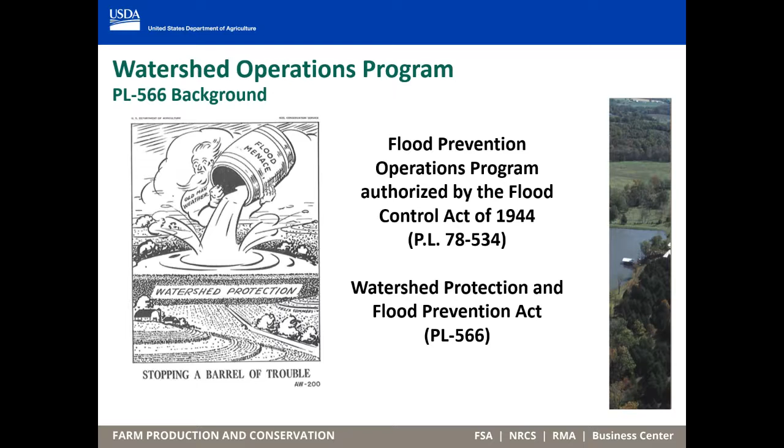So I'll just jump right back on it here. So let me give you a little bit of background on the PL 566 program in case you're new and this is your first time hearing about the program. The Flood Control Act of 1944 and the Watershed Protection and Flood Prevention Act, Public Law 566, PL 566, are the foundational legislation for the Watershed Operations Program. The purpose of the program was to authorize the Natural Resources Conservation Service to provide assistance in the planning and installation of flood control measures to reduce losses caused by flooding.

The Watershed Protection and Flood Prevention Act, as amended, authorizes the Secretary of Agriculture to cooperate with states and local agencies in planning and carrying out works of improvement for soil conservation and for other purposes. It provides for technical, financial, and credit assistance by the USDA to sponsoring local organizations, SLOs, representing the people living in watersheds. It also provides for needed additional treatment and protection of federally owned lands within such watersheds.

The Watershed Program requires the development of physically, environmentally, socially, and economically sound watershed project plans with actions scheduled for implementation over a specified period of years. Watershed project plans contain project actions which are formally planned undertakings carried out within a specified geographic area by sponsors for the benefit of the general public.

Public Law 566 sets forth three general purposes: preventing damage from erosion, floodwater, and sediment; furthering the conservation, development, utilization, and disposal of water; and furthering the conservation and proper utilization of land. The previously mentioned general purposes are more specifically refined as shown here. Every NRCS watershed project will have one or more of these purposes. In the next few slides, we will review each purpose in detail. As we do so, think about watershed scale projects in your area that could be addressed under the authority of one or more of these purposes.

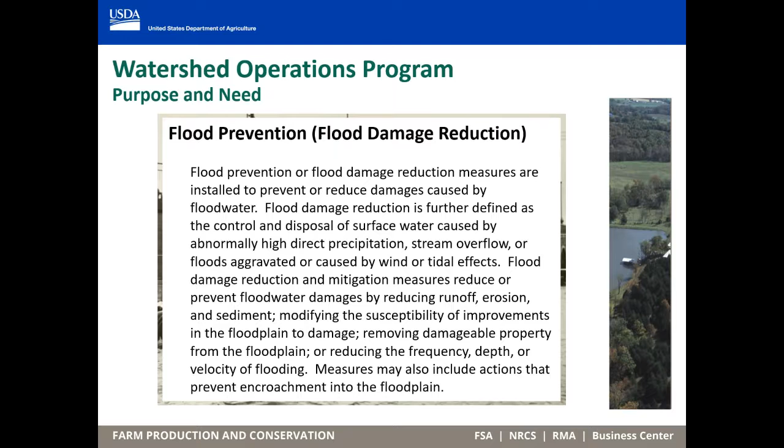The watershed protection purpose consists of land treatment practices within a watershed that result in reduced off-site flooding, erosion, sediment, and agricultural pollutants. Project measures result in conserved or developed soil, improved water quality or quantity, enhancements to woodland, fish, and wildlife habitat, recreation, and scenic resources. Watershed protection can also involve the conservation of energy.

The NRCS office in Tennessee worked with the town of Oneida to implement a project with this purpose in the Bear Creek watershed. Remnants of mining in the area during the 1800s resulted in acid mine drainage going directly into the creek, all but terminating any life in those waterways. After reclamation efforts and treatment of runoff through the watershed project, aquatic life was detected in reaches of Bear Creek that had been void of life for many years. The project also had a tremendous unexpected benefit of economic development to the area, increased home sites, and the construction of a recreational sports complex.

Under the public recreation purpose, measures may include picnic areas, sanitary facilities, fishing piers, shelters, cooking grills, parking areas, swimming beaches, access roads, water and trails. The public fish and wildlife purpose involves the improvement of the habitat or the environment for the breeding, growth, and development of fish and other wildlife.

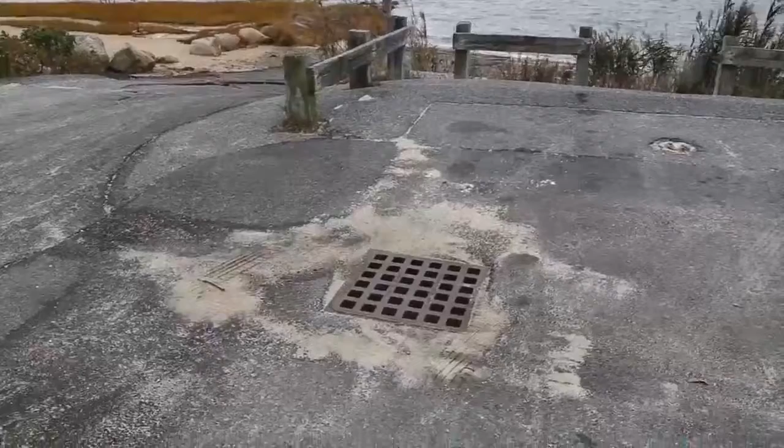It was discovered that inputs from septic systems and from roads and parking lots were the main culprit. What's happening in this location is after heavy rains, the stormwater runoff discharges into the marsh, and it carries a bacterial load, which then causes the state to close this area for shellfish harvesting. The first flush of runoff from a parking lot, from a roadway, from a watershed, particularly after a long dry period, contains about 85% fecal coliform.

And so we base our design criteria on treating that pollutant. We found 4 locations where the runoff was controllable and impactful. This is one of them. This is the boardwalk area. Across the marsh there was a parking lot that we also did some work on. We directed the runoff to these retention areas.

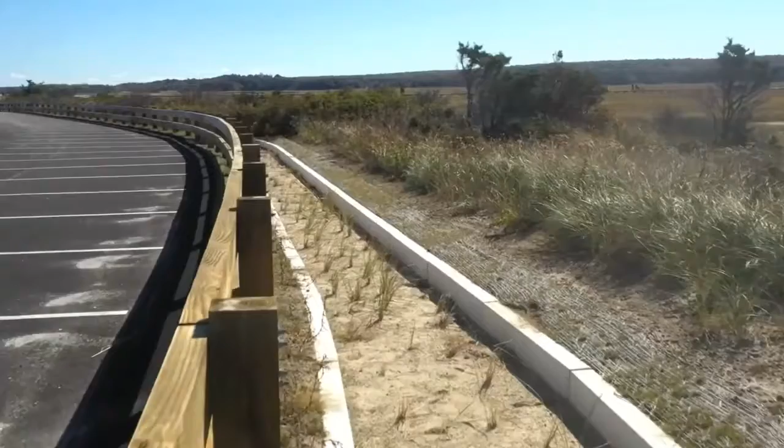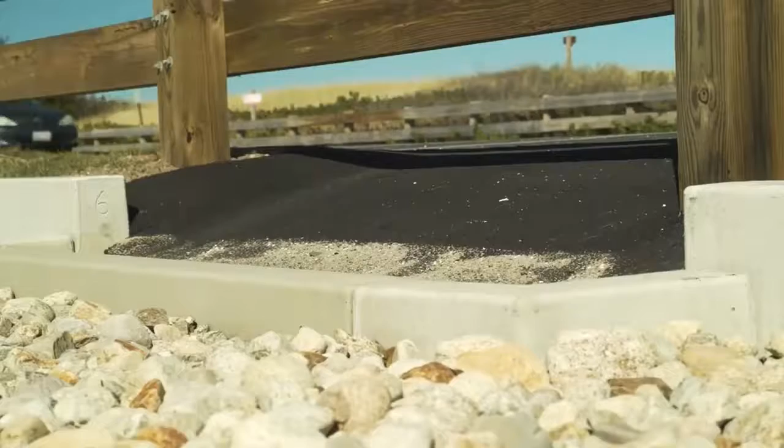They're basically sand beds or sand channels that have vegetation in them that perform the same function of removing the bacteria from the water flow. It's adjacent to the lowest area of the parking lot, so that water can sheet flow directly off the asphalt, collect in a small sediment forebay, get some initial pre-treatment, and then flow into the main treatment cell, where there's sand filter media along with plant media.

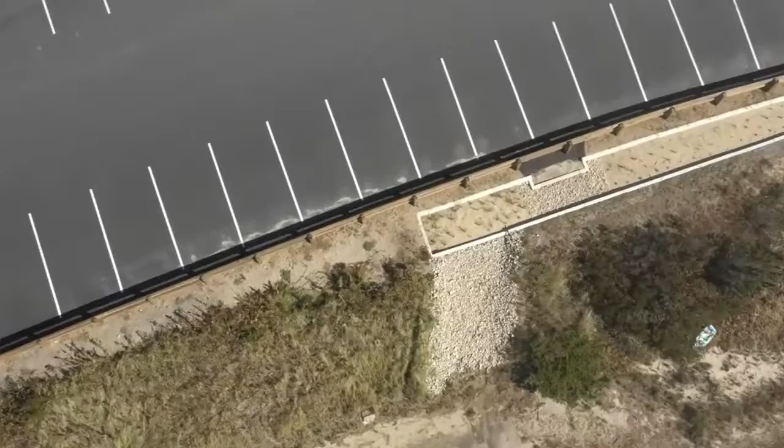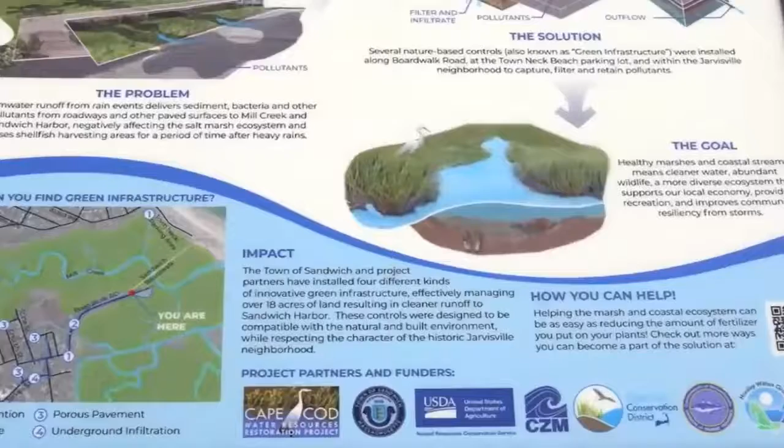And the combination of those elements then treat the stormwater and clean it up before it ultimately either infiltrates into the ground or flows through a filtered outlet system to the adjacent marsh. The Cape Cod Water Resources Restoration Project was an effort developed locally with local, county, and state partners to develop a plan for addressing resource concerns in salt marshes, anadromous fish runs, and shellfish harvesting areas. It covers all of Barnstable County, which is Cape Cod, with the exception of 2 large areas of federal land.

The value of a project like this and the whole Cape Cod Water Resources Restoration Project is to not only improve the environment, but to support local farms and food production, to hopefully add to jobs in the area, and to maintain this sort of seaside community way of life with recreational shellfish harvesting.

So that is one of some of the great work examples we've got going on out there. And hopefully we'll be able to work with many of you all in doing projects like that, or something that we've never done before.

And oh, let's see here. Stop the video, I think.

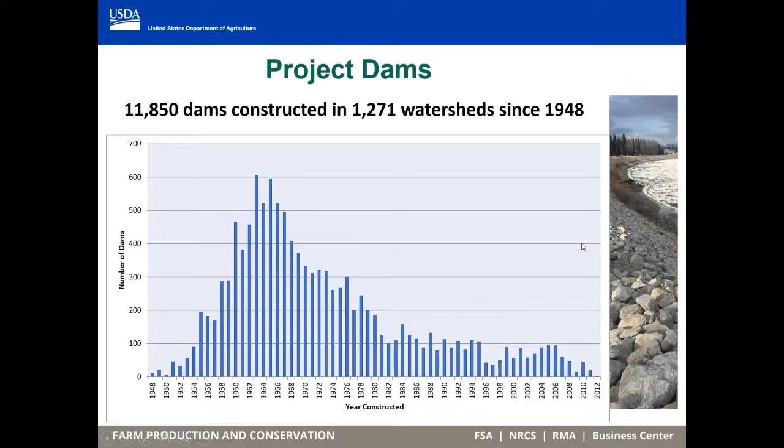Again, the project eligibility, as mentioned, are dams that were constructed under an NRCS program. Again, there's Public Law 83-566, Public Law 78-534, the Pilot Watershed Program, which was started in 1953, and also the Resource Conservation and Development. Also, dams that are past their evaluated life or service life are eligible for the rehab program. But as I mentioned earlier, the O&M must be current, and the program is not just to do O&M on a dam.

So what are the sponsor responsibilities in the rehab program? Well, they must have the power of eminent domain. They've got to be able to acquire permits and licenses as required by federal and state law, ability to levy taxes, arrange to carry out activities that involve public participation in planning. It's very important that the communities are involved in the rehabilitation program. And then also commitment of funding for required cost share and funding for operation and maintenance once the dam is rehabbed. And we'll go into the cost share later on.

Well, when the rehab program started, NRCS came up with a strategic plan to implement the program. And it really consists of 4 logical phases. There's assessment phase, and we'll talk about that in some detail. Then, of course, the plan of what are you going to do on this rehab. Design, once you get it planned, you want to design it, and then construction.

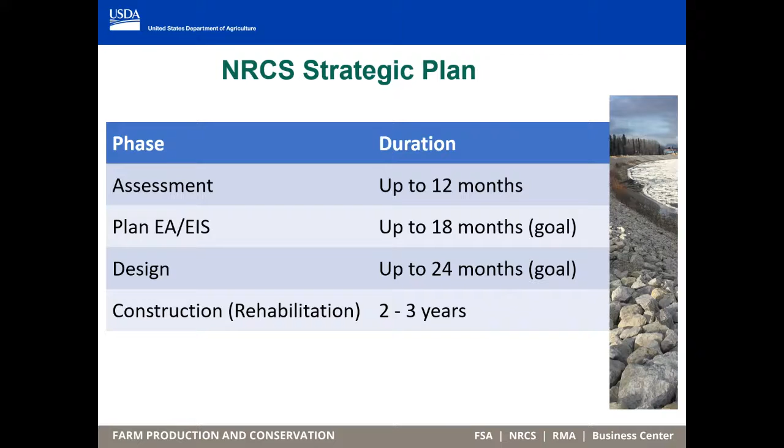Okay, dam assessment. Section 14I of Public Law 566 says NRCS will assess the condition of all dams covered in the rehabilitation amendments. So all dams that were constructed through an NRCS authorized program, our goal is to assess the condition of all those dams with priority given to high hazard dams.

Okay, what are the hazard classes? Well, there's low hazard class, and that's dams mainly in rural areas. There won't be any loss of life. It's kind of minor damages, where it's not a lot of cost if it was to fail. Of the 11,850 dams, 8,360 dams are classified as low hazard potential dams. Then there's significant hazard dams that are predominantly in rural or agriculture areas where failure may damage isolated homes, main highways, or minor railroads.

And of those, there's 1,070 significant hazard dams. High hazard dams, that's where a failure may cause loss of life or serious damage to homes, industrial or commercial buildings, etc. And of those, there's 2,420 high hazard dams. So you can see there's quite a number of high hazard dams that were constructed through NRCS programs. Of those 2,420 dams, many of them were really designed as low or significant hazards. So we have several high hazard dams that were not designed to high hazard criteria at the time. And of course, the criteria has improved over time. And so some of them, even when they were designed as high hazard, do not meet current criteria today.

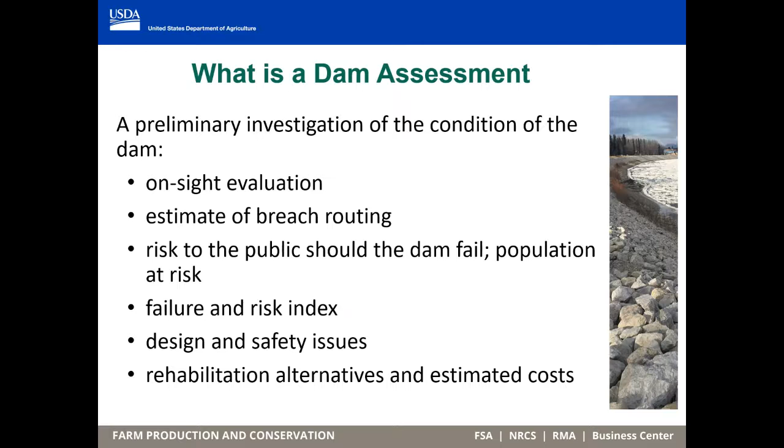And then we have a procedure where we compute the failure and risk index. And then we would determine what the design and safety issues are, and of course come up with rehabilitation alternatives and estimated cost of the rehabilitation. So what the sponsor ends up with is a dam assessment. It's a report. It's somewhat of a comprehensive report.

It's not as detailed as what you would do during planning, but it's really a report that provides the sponsor with the condition of the dam. It's a written report, and it's provided to the sponsor so they can use that information, that data, to determine whether to proceed with rehabilitation of their aging dam.

So the process is that the sponsor would request assistance for dam assessment by letter to the NRCS state conservationist. The funding priority will again be for high hazard dams. A report will be prepared by NRCS staff or an engineering firm hired by NRCS, or if as a sponsor you would like to hire your own A&E firm or consultant to do the report, that's fine too. And it would be through an agreement with NRCS.

And the cost of an assessment runs anywhere from $20,000 to $35,000, and that is funded 100% by NRCS. And we feel that a dam assessment is a good start to find out exactly what the issue is with the dam. It's not necessarily required to get in the watershed rehabilitation program, but it's highly encouraged that a sponsor get an assessment prior to starting the design, the planning phase. Okay, now we reviewed what a dam assessment is. I'll talk about the next step, which would be planning.

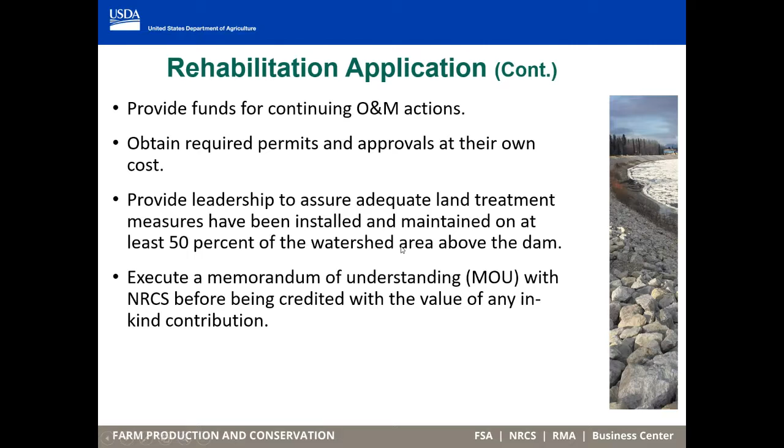The ranking will be based on potential for dam failure, consequences of that dam failure, what will happen if it did fail, and meeting the NRCS approved implementation plan, which Kevin will discuss at the end, what our goal is in this infrastructure funding. This is quite an opportunity for the rehab program because yearly we have only been receiving $10 million through discretionary funding, but through the infrastructure we're getting $118 million, which allows us to do a lot more than we have been able to in the last few years. So great opportunity.

So when you go through the planning process, you're going to go through NEPA. You have to go through all the required NEPA laws and executive order compliance, and you're going to end up, kind of like what Ralph said, with either a plan environmental evaluation or environmental assessment or environmental impact statement. The majority of the rehab programs end up being an environmental assessment, or an EA. And it requires a multidisciplinary team approach, engineers, economics, environmental staff, and we go through the planning process in the plan.

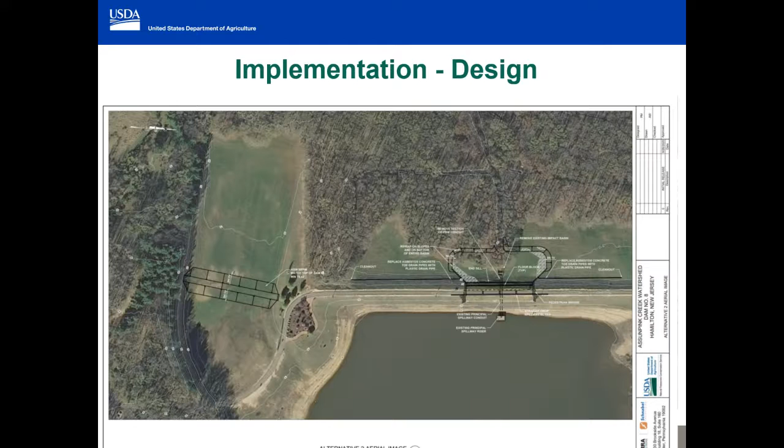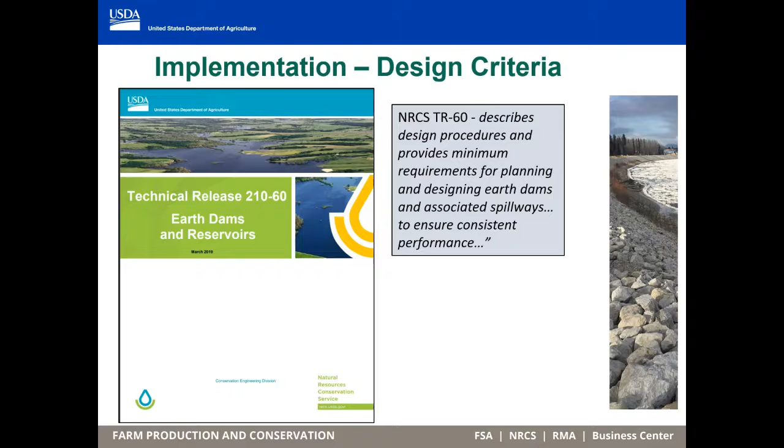Okay, after you got the plan and as a sponsor you decide you want to go into the design phase and on into construction, the next step would be your design. Well, you got to remember the design has to meet NRCS criteria. So we have a pretty extensive criteria that will be used in designing the rehab project, and it's basically covered in NRCS Technical Release 60, earth dams and reservoirs. And so that's available, and the design has to be in accordance with TR60.

As Ralph mentioned in his presentation, NRCS will cover 100% of the design cost of the rehab project. And design, again, can be developed by NRCS staff or an engineering firm hired by NRCS, or again, the sponsor can hire their own engineering firm and develop the design. You must remember that the design has to meet NRCS design criteria. We do have some statements of work developed that provide some pretty good guidance on the design process and what is required and all the steps that you need to go through in the design.

The design, no matter who prepares the design, requires review and concurrence by NRCS. So the designs will go through our National Design and Construction Center, and they will review the design at various stages, normally at the 30% or preliminary design stage, sometimes at the intermediate or 60% design stage, and definitely at the 90% stage where it's just about ready for completion. So all designs must go through NRCS review and concurrence.

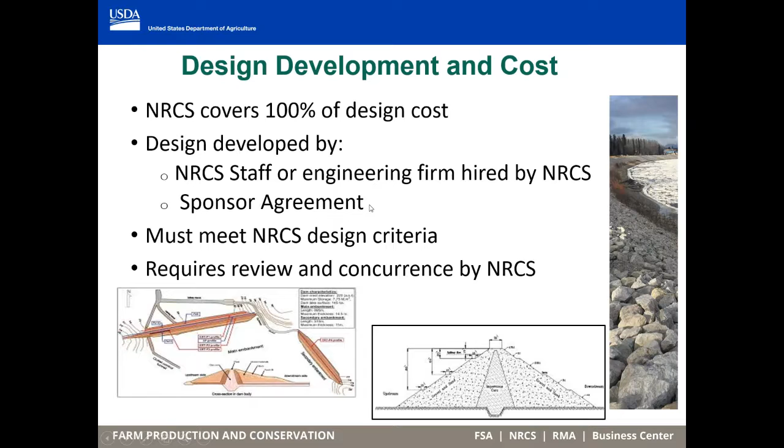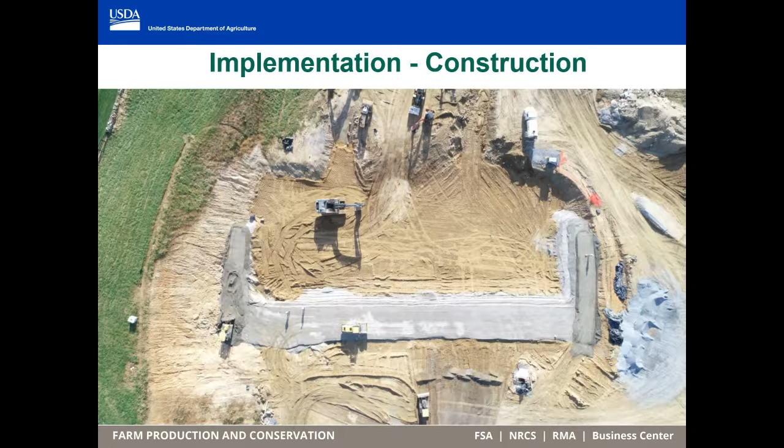But once it's designed and you have an idea what it's going to cost to do the rehab, then the sponsor can say, hey, I want to go into construction. So let's talk a little bit about the construction. Well, pre-construction responsibility, we got to have all the permits, and that's the responsibility of the sponsor. You got to agree to a new O&M agreement and plan, so that will be developed during the design phase and signed off prior to construction by the sponsor. Certify that you have current land rights to do the project. We get that information from the sponsor. And for high hazard dams, which most of them will be for the rehab program, you certify an emergency action plan.

So all of these things have to be in hand to NRCS prior to funding for construction. Again, we're in the same situation. Construction can be accomplished by an NRCS federal contract, or it could be sponsor-led through an agreement with NRCS. So the opportunity to go either way is up to the sponsor, whichever is the easiest way for them to handle the construction contract.

Okay, the cost share: NRCS provides 65% of the total project cost, not to exceed 100% of the construction cost. And I'll show that to you in just a few minutes. If you go back to the Watershed Program Manual, one of the purposes that Ralph discussed was rehabilitation. And in that table, it says installation construction no more than 100%. And engineering technical assistance, NRCS pays 100%. And real property rights, like a lot of purposes in watershed operations, is a sponsor cost.

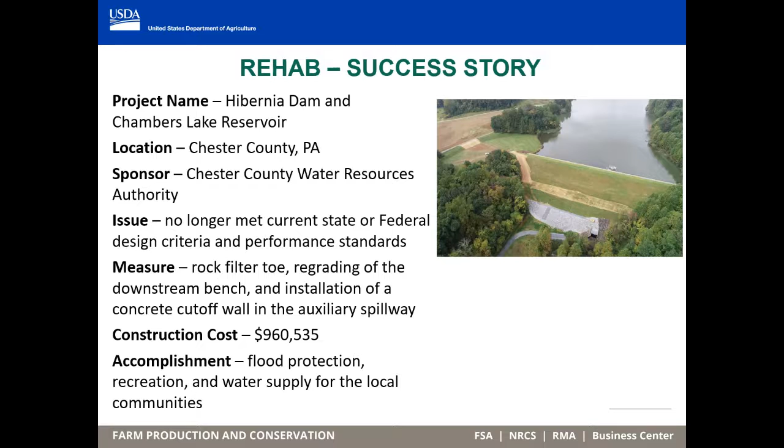So in basic summary, in regards to which phase you're in, the sponsor submits a phase request to the NRCS State Office for project funding with the required documents that we discussed earlier in my presentation. All the phases have certain required documents. The NRCS State Conservationist will review the request, determine if it's eligible, and submit to national headquarters for funding.

And then once it's decided that it's going to be funded with the available funding that we have, the sponsor will receive notice of funding approval. So it's a pretty straightforward process. Hopefully this gives you a good overview of the Watershed Rehab Program, and we look forward to you submitting requests for funding. Lark, I'll turn it back over to you.

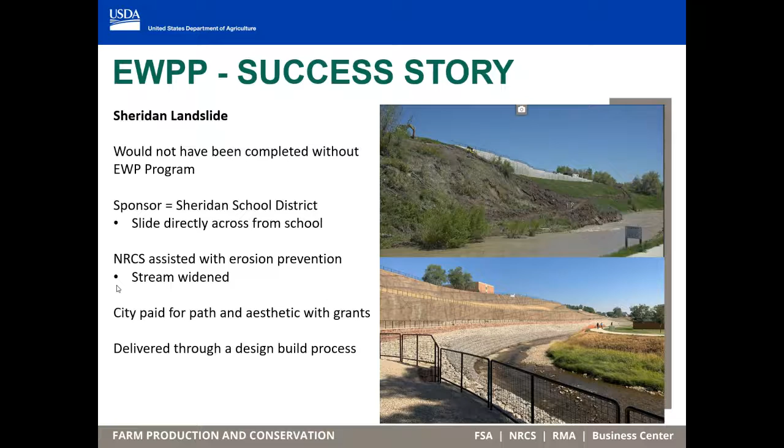The EWP authority, it's a fun little authority because it's literally only one sentence long, and so that provides us a wide berth of flexibility to make sure that we're able to quickly and accurately address the problems out there that might be in the watersheds. But basically, the Secretary of Ag is authorized to undertake watershed protection measures, including floodplain easements. That is an option when NRCS determines that's the most prudent choice for the area.

And those measures have to be for runoff reduction and soil erosion prevention. Have to be in cooperation with the landowners. This is a two thumbs up process, one from NRCS and one from the sponsor. They have to be necessary to protect lives and property. And those are when something like a natural occurrence causes a sudden impairment to the watershed. The program's administered in all 50 states, District of Columbia, and the rest of the U.S. territories in areas throughout the Pacific Basin.

So just to clarify again, EWP provides recovery assistance. Two things that can put EWP on your radar as a sponsor is if there's a federal emergency declared by FEMA. That's something that will make the program available.

But also if it's a localized event where the intensity is high, but it's not widespread enough to warrant a FEMA declaration, well, the NRCS state conservationist can go ahead and declare, hey, for this particular area, we have a local watershed emergency, and we should be looking to provide assistance through EWP. So that again is made at the NRCS state level as well.

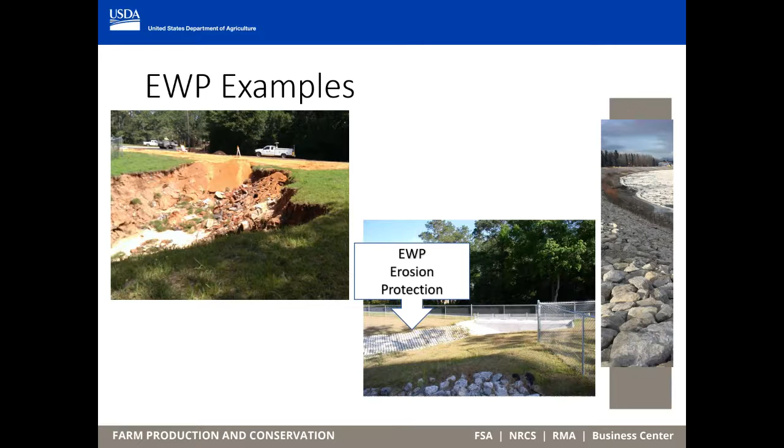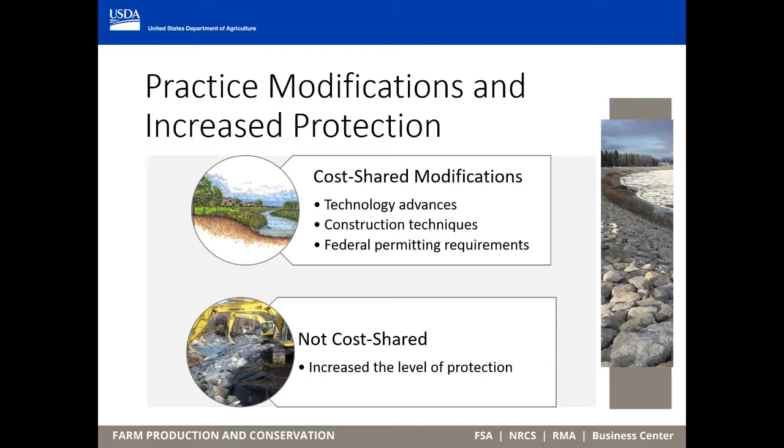Practice modifications and increases is just kind of a side note. Not only will we cost share on the measures for flooding and erosion protection, but we'll also cost share on measures for technology advancements, changes in construction techniques, and any federal permitting requirements that come through the planning process. Those are cost shared as well on the NRCS side. Not cost shared will be things like increased level of protection if a particular structure has a certain design threshold. EWP funds can't be used to cover protections up and beyond that. It's not a new protection type program per se.

Eligible EWP practices. These are all-the-time EWP conditions: every single EWP measure and practice must provide protection from flooding and soil erosion. They must reduce the threat to life or property. They must restore the hydrologic capacity to the natural environment to the maximum extent practicable, and they must be economically and environmentally defensible and technically sound. We have processes for working out each of these items, but it's very important that we're doing good work out there in the landscape through the EWP program.

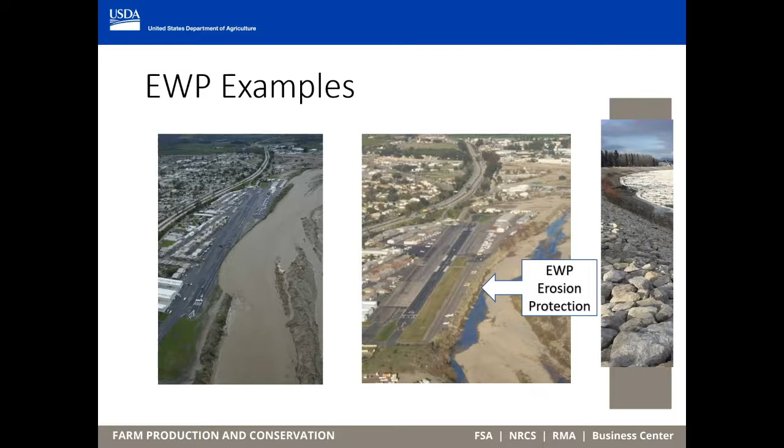So as mentioned previously, how do we progress through this? It starts off with informal discussions between sponsors and NRCS staff. If it's something the sponsor wants to pursue, they can put in a formal request that obligates NRCS for action, and NRCS must then complete a damage survey report. This is similar to the assessment or the PIFR type phase, but it's the initial planning phase of EWP. The damage survey report will include the proposed emergency practices and provide cost estimates, and that DSR is completed within 60 days of your formal request.

And then if funds are available and the DSR meets the programmatic requirements, the projects and practices in that damage survey report will be funded, and funds will be allocated for those exact activities and provided to the NRCS state conservationists so that they can enter into an agreement with the local sponsor.

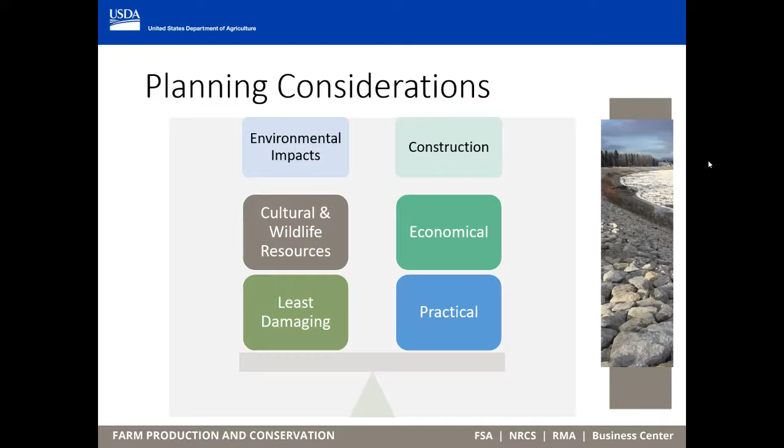Planning considerations, these are in the rule for EWP, and as Jesse mentioned, we still are running through the 9-step planning process, but special consideration needs to be made for EWP for things like cultural and wildlife resources. They need to be the least environmentally damaging, but that needs to be balanced with both economical and practical solutions. So it's a balancing act, but it's important work to make sure that we're putting good work out on the landscape.

Again, after the request came in, we did the DSR, and the funds are allocated within the EWP. Then NRCS funds are made available, and these come in 2 flavors: financial assistance funds, used for NRCS's share of the construction cost, and technical assistance funds that can be used for planning, design, contract administration, and construction oversight.

So let's say those funds are available for the project. Those funds can then be formally obligated, meaning formally put into an agreement with the sponsor. That agreement will detail the responsibilities and cost share between NRCS and the sponsor, and it will document if funding will be provided to a sponsor based on a sponsor's willingness to contribute to planning, design, and construction.

These are case-by-case situations, depending on a sponsor's area and amount of expertise versus NRCS's area and amount of expertise, and these are worked out individually. So again, it's a very wide array that can be pursued, but we do that intentionally so that we can have max flexibility moving forward in these emergency situations.

Again, the funding type: we have funds for both construction costs and the technical services, and those are allotted and obligated and put to the elements that can either be passed over to the sponsor to carry out certain responsibilities, or kept within NRCS, or NRCS can also contract that out through a federal contract.

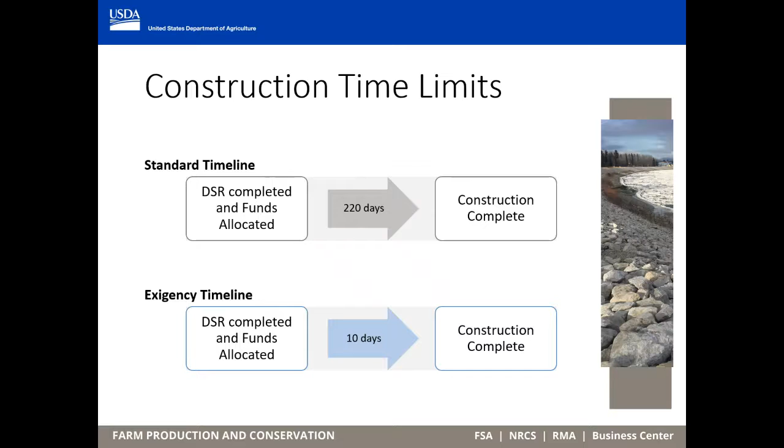Exigencies are a type of EWP work that needs immediate action, as in, something bad is going to happen in the next few weeks and it's going to get worse. These are the top funding priorities for the EWP program, and we have a couple of streamlined approaches when these situations arise. Specifically, when funds are allocated, those measures are completed within 10 days. Those measures can also be temporary, and we can come back and finish it up with a more permanent solution within the 220-day window.

Cost share and construction costs. These are somewhat standardized, but for the majority of construction costs, we'll be looking to the sponsor to provide 25% of the construction costs in the form of cash or in-kind services. That changes if a county or tribal area meets the limited resource area definition, and your NRCS state program manager will help you identify these areas. In those cases, we look to the sponsor to only provide 10% of the construction costs in the form of cash or in-kind services.

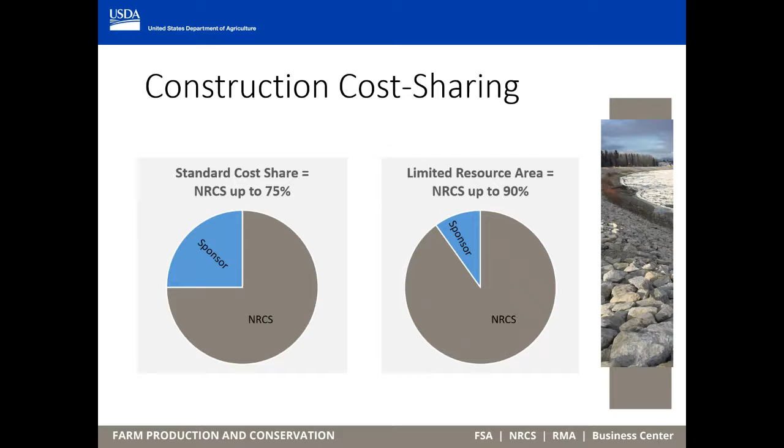And then the sponsor contributions, I hit on those before. All this will be formalized in the formal agreement. In conclusion, it's a fairly straightforward process. We go through hundreds of agreements a year with sponsors, so it's an active program with lots of projects going on across the country and regions. It's a fairly worn-in, established process, and we're happy to help you get the emergency relief for the soil and erosion concerns that are the result of natural disasters.

And again, start with your local office as best as you can, and they will be able to point you in the right direction on what you need to be doing in order to enter the EWP program. So with that, Lark, I'd like to kick it back to you.